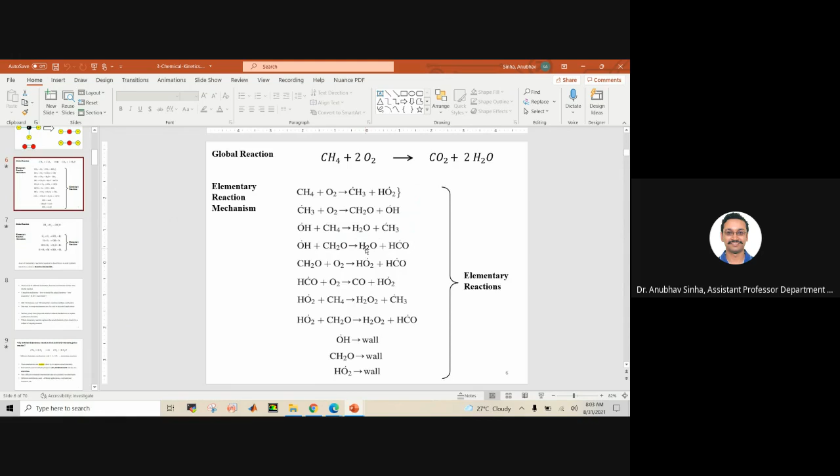Sir, free body or FRE? Three, not free, three body. Let me go to that slide. Generally we have two molecules or two species colliding and forming something, but there also exist other cases. Let me look at the detailed reaction where we have defined different types of... yes, this one.

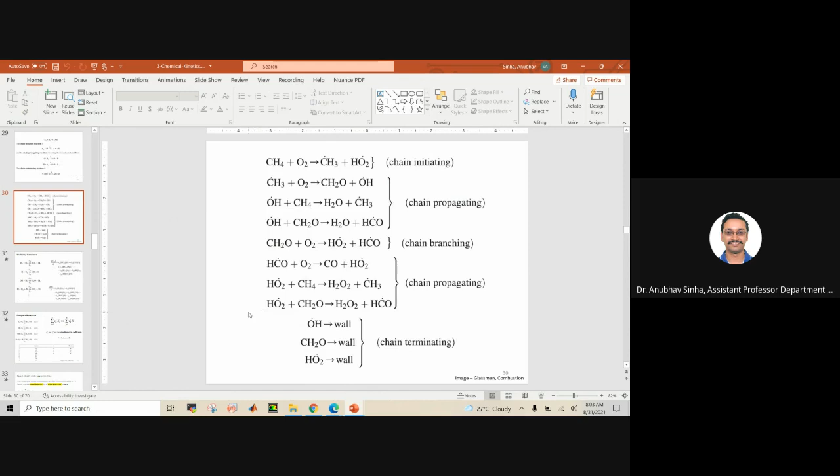This example does not have that, but there are certain reactions which will be combination of three body. Let me see if I have any such example. Okay, like this. So what happens? Two radicals combine with any third body, and they form a stable atom, stable molecule.

So what type of reaction is this? Chain propagating or chain terminating? Yes, this is third body. Sir, it is terminating. Terminating.

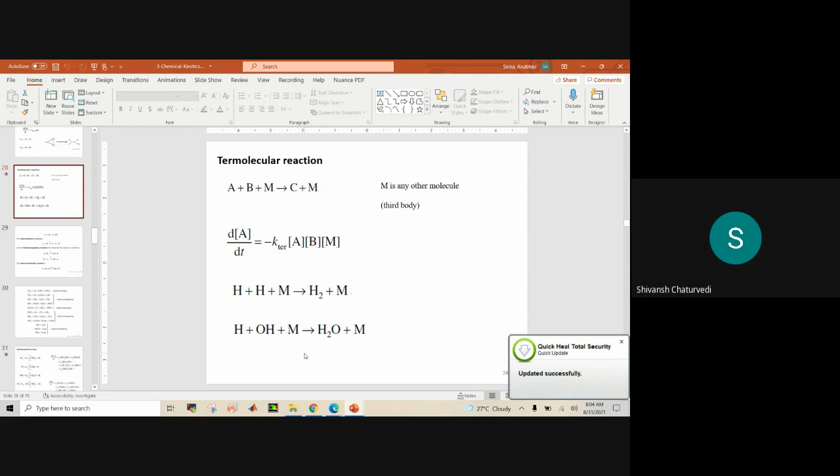If you remember when we talked about bimolecular collision, here now we need to consider three body collision. So will it be more probable to have three body reactions when you have a large number of atoms or a small number of atoms? A large number of atoms. If there are a large number, there are higher chances, higher probability, right?

We generally talk about probability, the probability that two atoms will hit, and that probability will be between 0 and 1. It could be low, it could be high, but it will vary between 0 and 1.

So at higher pressures, do you think the number of molecules will be higher? Number of molecules per unit volume will be higher or lower? Sir, it will be higher. Higher. So we'll have higher molecular density, molecules per unit volume will be higher.

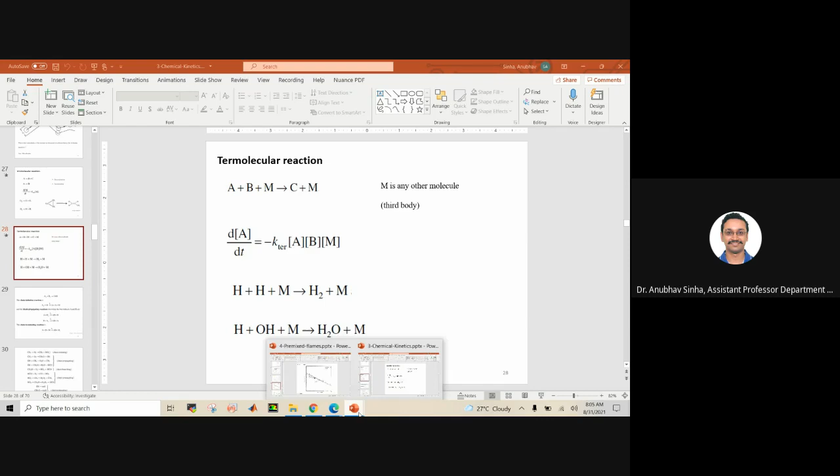The probability that they will collide will be higher, and the probability that they will lead to this type of reaction will be higher. Because of that, this decreases. Flame speed decreases with pressure. Is this clear?

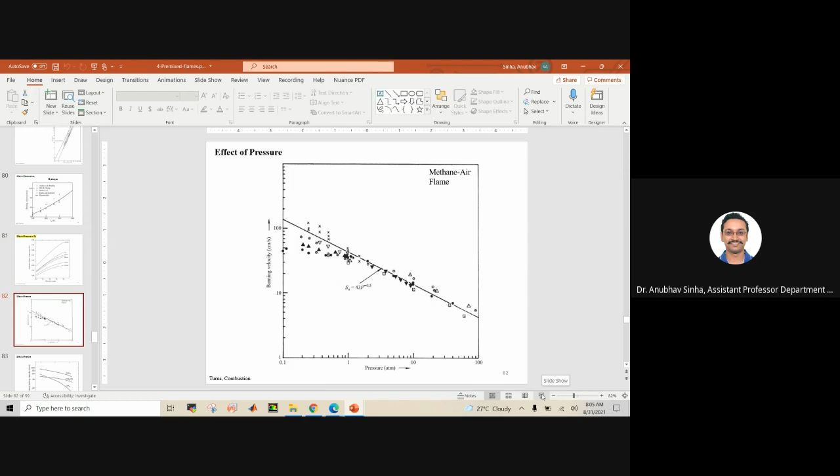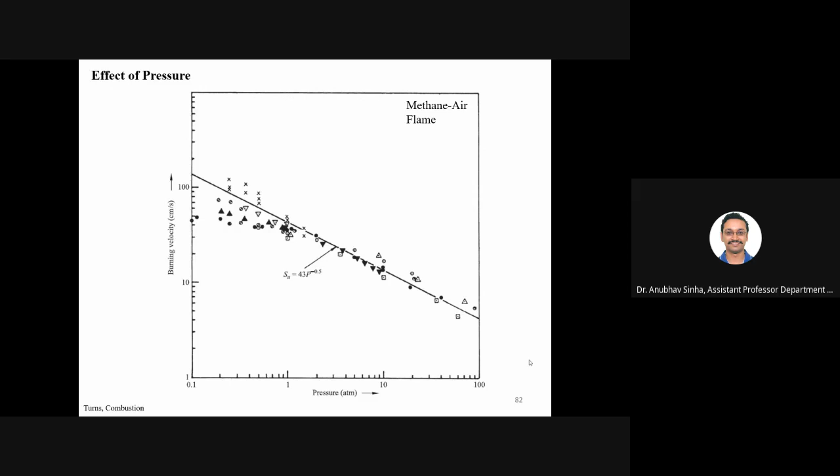Yes or no? You want me to repeat it, or is it clear? Sir, it is clear. Okay, fine.

So this was about the effect of pressure. Now moving on. Up to here we have discussed, right? We'll just summarize. We talked about equivalence ratio, how SL varies, this was a homework. So how many of you have looked into this?

What is the real reason, or why is the peak temperature not at the stoichiometric mixture but at a slightly richer mixture? What is the reason? Can anyone explain? Yes?

Okay, you do some search and mail it to me. Maybe I will wait for your mails. When you all have mailed, then I will discuss in the class. I will give some marks for that. So do some search, you can easily get some numbers or figure out the reason. Try to think of it and come up with an explanation. Then I will finally explain what is going on.

Okay, so this is about equivalence ratio and temperature. We have seen that if you increase the initial temperature, SL will increase. Just now we discussed about pressure. And inert gas, basically, has a lower specific heat than nitrogen, so SL becomes higher. Okay, so all this we have already discussed.

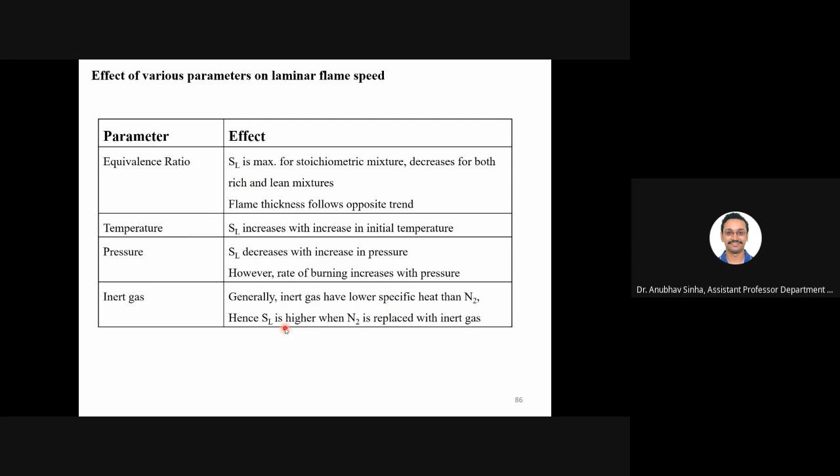Now let us take one example before we move on to turbulent flames. One simple example I wanted to highlight to show what issues are involved. When we talked about flame speed measurement, right, this is one method that we discussed: if you have a Bunsen burner, you just take an image like this.

Or there are Schlieren images, you can take an image of the flame, and you say that a uniform velocity U is coming, and U sin theta will give you SL. Is this correct? Yes sir. Anything that looks suspicious, or any assumption which may or may not be correct?

So let me say I am assuming that your velocity U is uniform throughout this cross section. Is it a good assumption? Can anyone see any problem with that?

Or is it okay? U should be uniform. What do you feel? Sir, U will probably increase ahead. No, not about this direction, I am talking about this. Okay, let me draw.

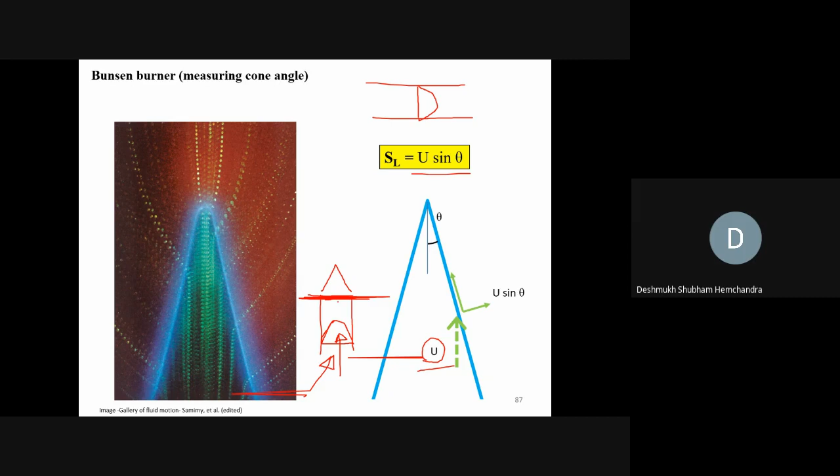Yes, sir. Okay. And in Hagen-Poiseuille flow, when you talk about flow in a tube, you know that the maximum will be how much of the average? Double. Double. So, and what else do you know? It is a parabolic profile. So, can I say that the velocity profile is symmetric and varies like this?

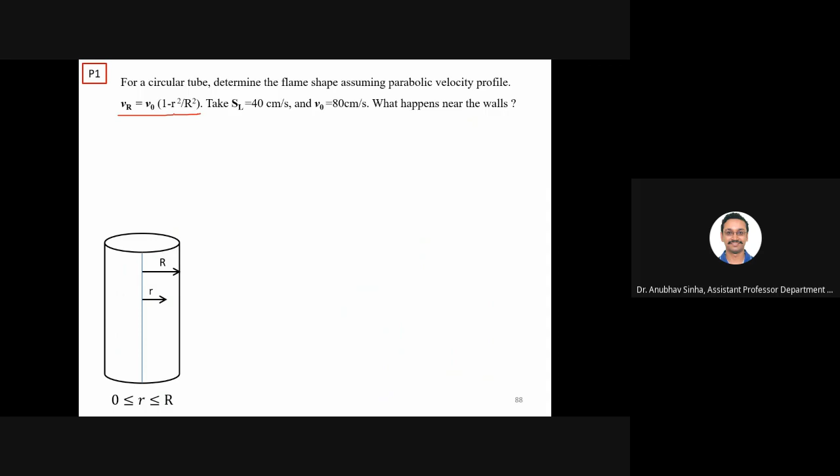V naught is what? Vr is the radial velocity at radius r, I should write it small r. Okay, Vr is equal to V naught into 1 minus r square by R square. So it will be at the center, it will be V naught, so V naught is the maximum velocity. And what is the velocity at the wall? Let us say small r is equal to big R, capital R. So what is the velocity then? It is 0. 0. So it satisfies your parabolic velocity profile, right? This equation.

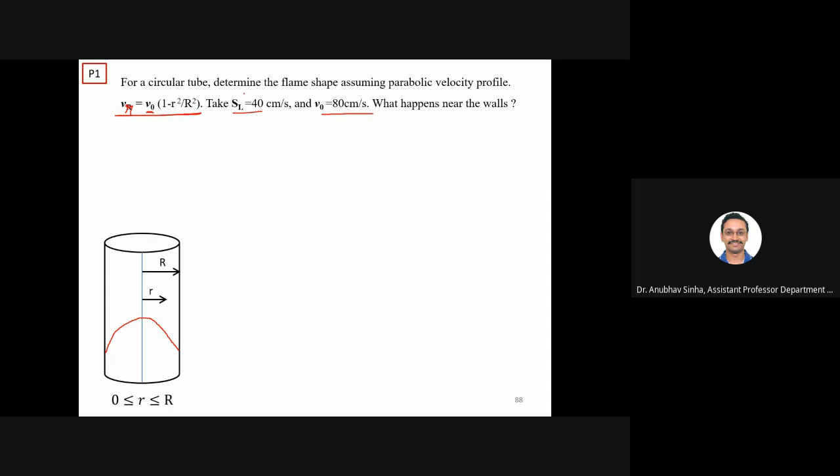Everyone is clear about this? Yes, sir. Okay, so this is given to us, and we know that SL, this corresponds to roughly, I think, for methane. Okay, now we notice for v naught equal to 80. This is also given. So the question is whether you can find the SL, and based on that, can you find how the flame looks like? Okay, here what I have assumed is that the flame is having a straight line.

So let us examine it more closely. Let us probe this, whether it will be a straight line or not. Okay, so this is given to us. So what you can do is, we also know that SL will be equal to U sin theta.

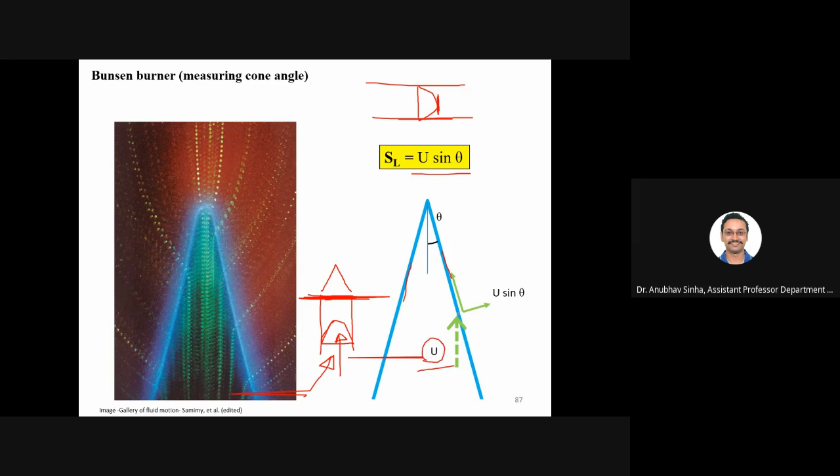So if you look at this side, let us say that at each different point, let me delete it, make it clear. Okay, now let us say at each point the velocity is different. Okay, that was the assumption that U is uniform. Let us say even if it is not uniform. So what will happen? Let us say it is U1 here, U2 here. But at each point, since I am assuming the flame to be stationary, flame is not moving, so at each point, SL will be equal to U1 sin theta 1, U2 sin theta 2.

Do you agree with that? SL has to match this component of velocity. That is what is required. U being uniform is not necessary, but SL should be matching this component, U sin theta, for that local U sin theta. That is required.

Sir, will theta be constant? No, theta will not be constant, that's what I'm trying to highlight in this example. Towards the center, theta will keep decreasing. Yes, in the next two slides we'll see how theta will vary. But the important thing here is that SL will match whatever U or theta is there. SL will try to match. Then only the flame will be stationary, otherwise the flame will move up or down.

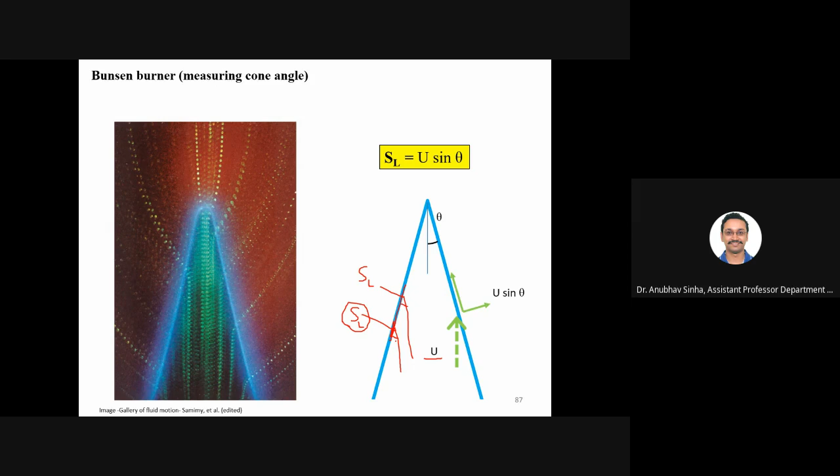So what we can do is write SL in the form of sin theta. U we know, the expression of U I'll get from here. This is U sin theta. Now I can write sin theta equals SL divided by this. Is this all right?

Yes sir. So let us make an Excel file and calculate sin theta for different values of r by R. r by R can vary from 0 to 1, so I have taken 0.1 to 0.9. Now what will be sin theta? Sin theta is this much. So if I know r by R, if I know v naught, if I know SL, I can calculate sin theta.

Sir, sin theta is exceeding 1, which is not possible. Yes, we'll come to that, good question. For now, let us forget about that point. Up to here, are you okay? Yes sir, it is okay.

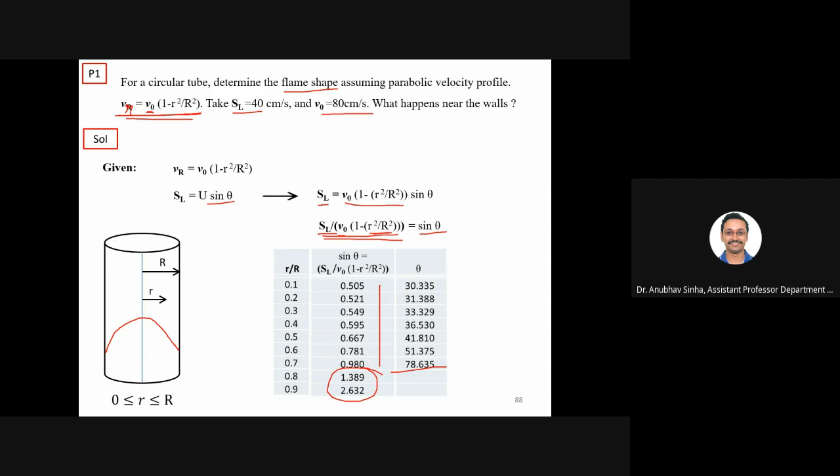Now I will define theta for all these points. So what do you see? Is theta constant or is it changing with r? It is changing because of that velocity function. Yes, so this is how you can plot it. Theta is changing with small r, the radius of the tube. So initially what we thought was that it will look like a straight line. That is approximately okay, you can say it is uniform and a straight line, but actually in real what happens is theta is increasing as you go out. So theta 1 will be smaller than theta 2, which will be smaller than theta 3, and the actual profile will somewhat look like this. Is it clear?

Yes, no? People are present or not? Sir, could you repeat the point? Yes sir. Someone has a question? Please repeat, sir, could you repeat the last part?

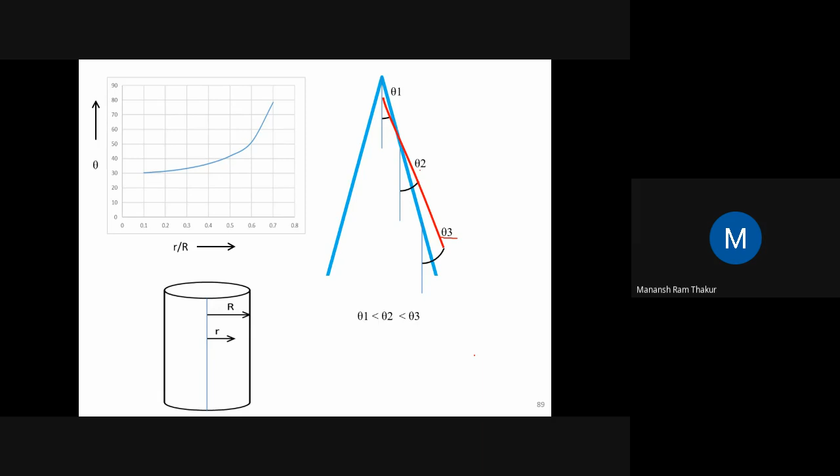Okay, so basically what I am saying is, using this relation, I calculated sin theta for different r by R, different radius basically. From sin theta, if you take the inverse, sin inverse, you will get theta. Up to here we have calculated. Let us for a moment forget about this, I will explain again. So I have theta for different radial positions, that's all, and that is what I am plotting here. So if you keep on increasing radius, your theta will increase. Is this clear?

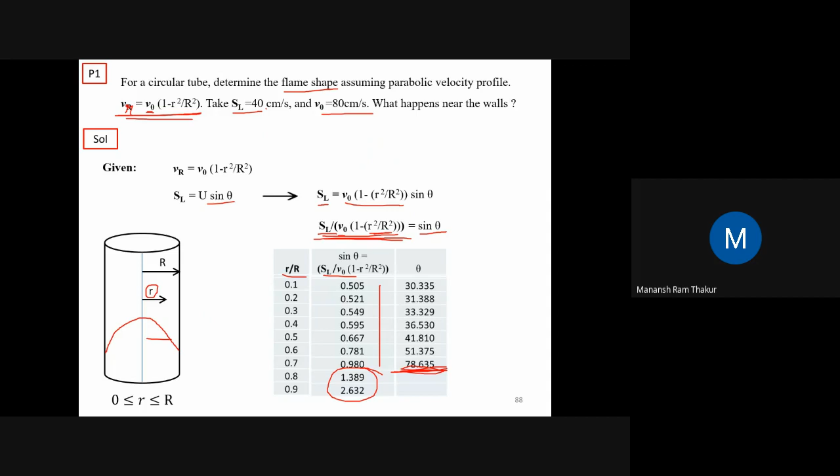Yes. Sir, is it the ratio? You had a doubt in the last slide as well, here you have a question. Sir, it is increasing with the ratio, I can't understand why it is increasing with R. So you can just follow this relation, there is no separate logic why it increases, this is just coming from this equation. Basically, I will come to the logic also.

This is the velocity profile we have. We know that at any point, whatever U will be, U sin theta has to be equal to SL, otherwise it will not be a stationary flame, right? So from this, if I substitute U here, I will get this. Then just divide SL by this quantity, you will get sin theta, right? Now what is given? SL is already given to us, 40 centimeters per second. This is 80, so it becomes basically 1 by 2, and this is the only variable, right? If I want to calculate sin theta, what value do I need to know?

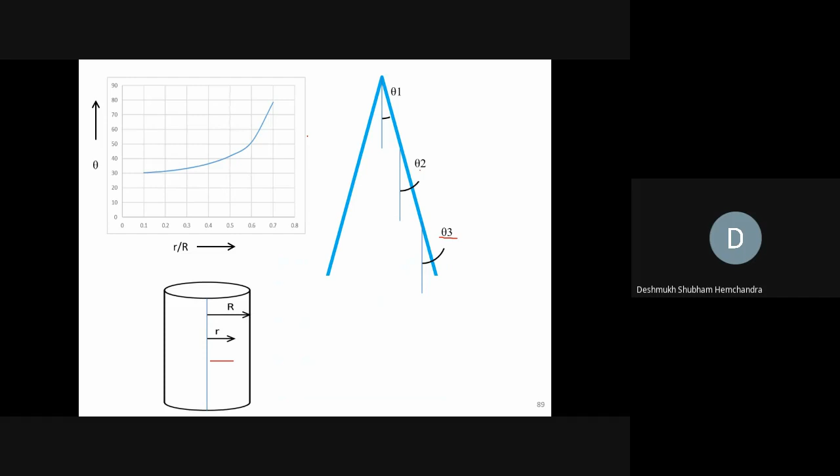Near the wall, okay, we have not covered the topic, but there's something called quenching. So near the wall, the flame speed will decrease. In the next topic I will clarify that. So there, the flame will basically be sitting on the wall.

Near the wall there are some other interesting things going on that maybe today we'll try to cover. Because of that, at 0.8 and 0.9 we will not use sin theta, we'll say that the flame is anchored on the wall.

So as you can see here also, if you look carefully, what it shows is that theta is slowly approaching 90 degrees, right? So basically, this is your flame tube.

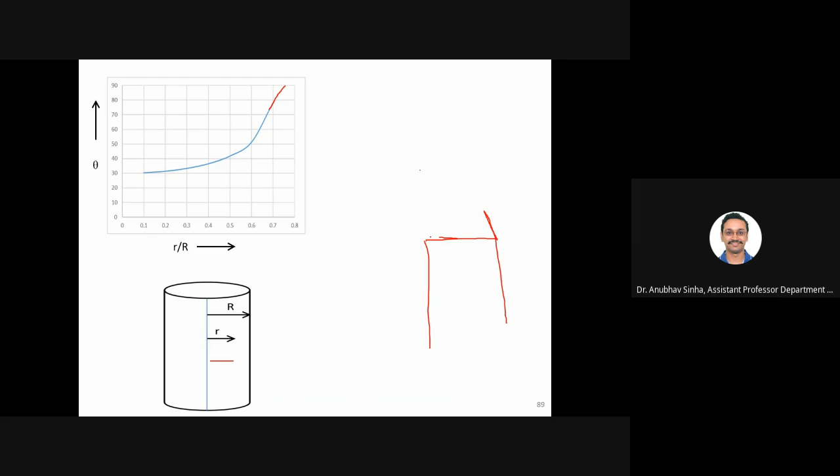What it means is that at the end, it will be almost 90 degrees sort of, which is not actually true, but it will approach that value. And again, what happens is that near the wall it gets quenched, it extracts heat.

So SL decreases. So all this relation we have talked about will not be valid when you approach very near to the wall. Very close to the wall, it will not be valid.

So sir, very close to the wall, what will be the value of theta? It will be, the flame will be anchored. Okay, just be patient for some more time.

In the next chapter, initially in the first few slides, I will discuss about it - what happens near the wall. For now, just assume that the flame is getting anchored.

How it gets anchored is an interesting topic, but for the next chapter. We need to understand what is quenching, what role the wall plays in quenching, and what sort of velocity profile we can observe. I need to give you some background, then I will talk about it.

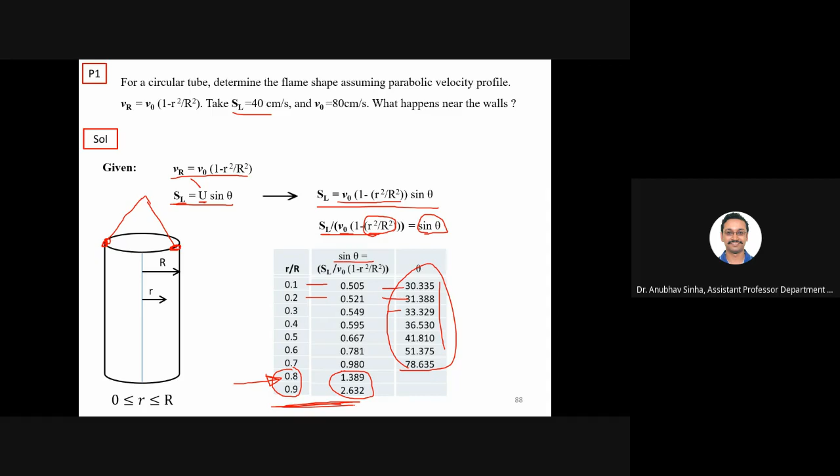Is it clear? Yes sir, it's fine. This is good that you asked. This is a separate topic itself, so let us delay it till we reach there.

Okay, for now what I will do is, we have covered laminar flame, and we'll quickly look into turbulent premixed flames, then we'll move on to the next topic about wall quenching. I think the few slides I presented in the last class, I'll anyway quickly go through them again.

Strictly speaking, it is very difficult to define what turbulence is, but we know there are some characteristic features. One of them is it will be non-uniform, it will be unsteady, it will have higher transport properties, it will be irregular.

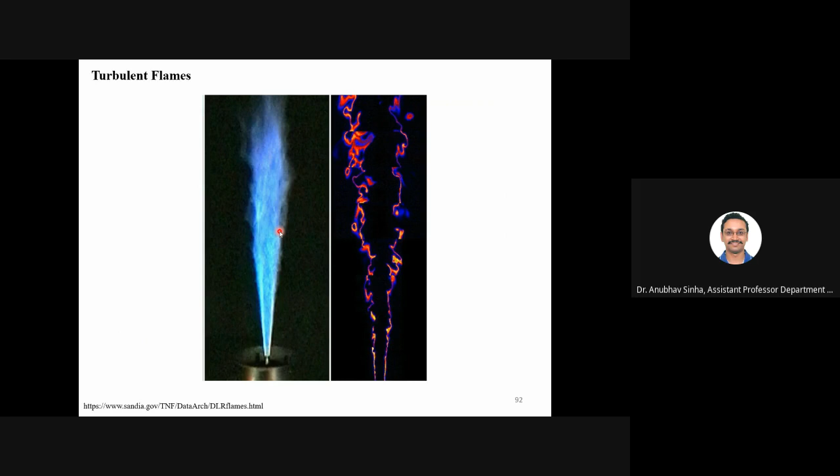So all those properties define turbulence, but visually you can see there is a difference. For combustion study, what is important for us is that the flame area changes. Let us see what happens.

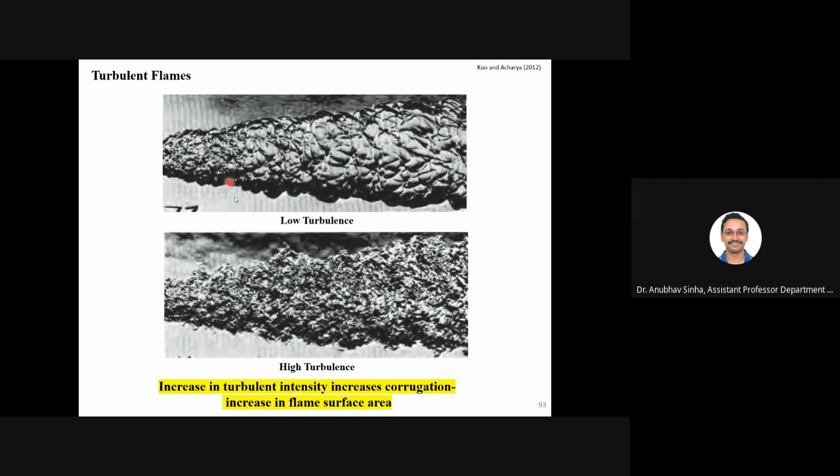Now, how will it affect flame speed, or what impact will it have on combustion? To understand that, see, this is the simplest example for a 1D flame, which is what I'm using for most of the concepts.

So this is a simple 1D flame. Fuel is coming from the left and burned gases are on the right. So what will happen because of turbulence is that your flame surface area is increased because it is getting corrugated. Remember, last class I also discussed this.

Let us say you have two tubes, one smaller tube, one larger tube. So the larger tube will have a larger flame surface area and it will consume more fuel, right? If we talk about laminar flame, SL is the same, so m dot will be more for this, right?

For the same exact conditions, flow rate will be higher for a larger diameter tube, right? What happened students, are you sleeping or not connected? The second one, m dot will be larger. So, not turbulent, let me clarify.

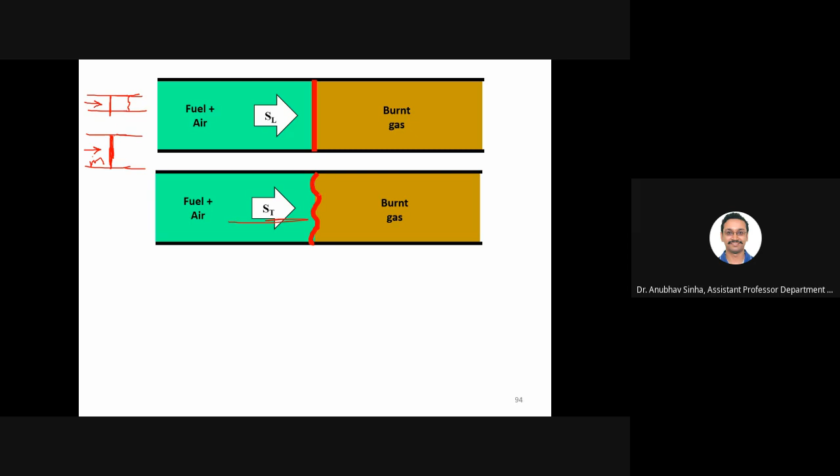Now somehow what I can do is have this same diameter but a larger surface area. Let us say I have an area like this. Then I can increase the flow rate, right? More fuel it can consume. The same thing is happening here. It has a larger surface area and it is able to consume more fuel. So ST will be larger than SL.

So there are a lot of interesting processes going on in turbulent flame. Turbulence also affects your chemistry, which is an area of ongoing research. But to keep it simple, we'll focus on the increase in flame surface area. This is one of the dominant mechanisms which helps ST to be larger than SL.

So this will be true: turbulent flame will have a higher flame speed when compared to laminar flame speed. Sir, larger area is clear, but why should it have a higher S?

Okay, that's why I'm giving you this example of two tubes. Stop me whenever you have a doubt. So two tubes, smaller diameter, larger diameter. Let us say m dot 1, m dot 2. Which will be larger, m dot 1 or m dot 2? M dot 2. Why?

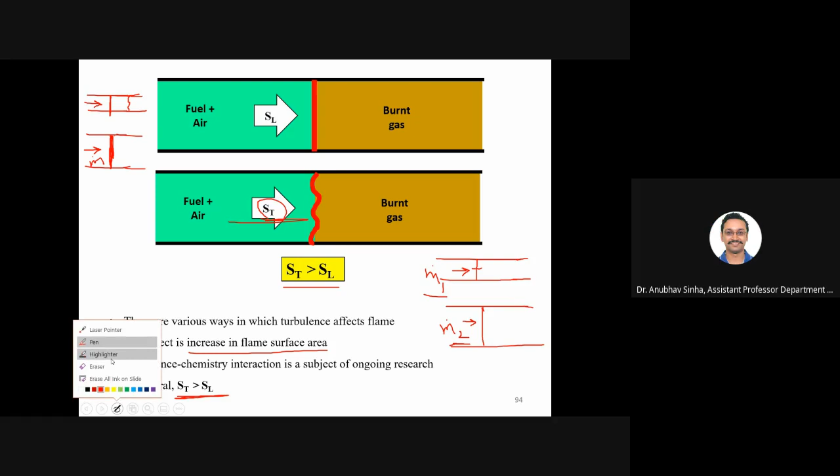So the only reason could be what? The flame area is different, right? Flame is an animal which eats fuel, let us look at it that way. So we have a bigger animal here, right?

Yes sir, I'm saying we have a bigger animal here, we have a smaller animal here, so this one is eating more fuel. Now if I take this bigger animal and somehow adjust it into a smaller tube, it will keep on eating the same amount of fuel, it will keep eating M2 only. Then I will get a higher flame speed here. Do you agree or not? Yes sir, I understood that part.

Sir, so for same area, isn't it how we define turbulent in the form of Reynolds number? So Reynolds number high means velocity high, sorry, turbulent and laminar is differentiated by Reynolds number. Correct, Reynolds number differentiates, so higher Reynolds number means higher velocity, that's why it should be turbulent. So automatically in case of turbulent, its velocity should be higher, no?

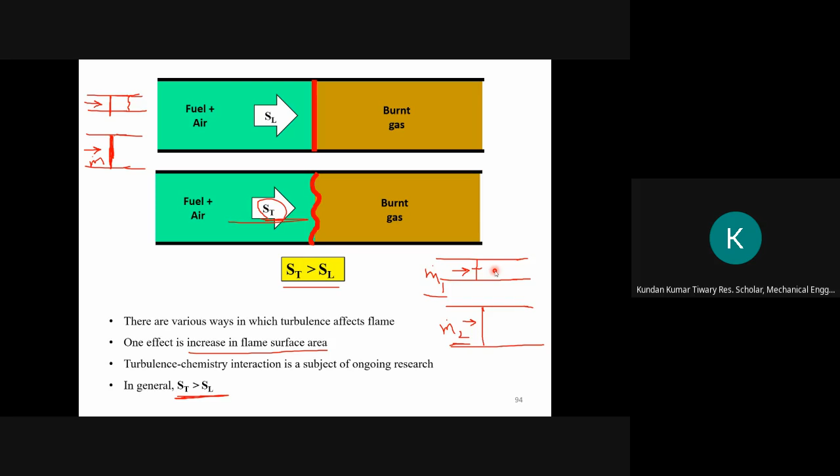Why are we comparing, meaning ST greater than SL? Okay, I am just taking a very simple comparison to explain why. See, you're correct, velocity will be higher, but the question is why, how is the flame able to eat up more fuel? If your ST is higher, what does it mean? Simply means more fuel is coming, more fuel is getting consumed per unit time.

Suppose I am burning 1 kilogram of methane in a laminar flame. In a turbulent flame, I can burn 3 kilograms of methane, 3 kilograms per second, or 3 grams per second, whatever the case may be. So even for the same tube diameter, if I have higher velocity or higher initial turbulence, somehow I am managed to get one laminar flame and one turbulent flame.

So what I am trying to explain here is that if you have a turbulent flame, it will have higher capacity to eat fuel. That's all, and that can be attributed to one reason: flame surface area.

Is this clear or not clear? Yes, sir. Everyone? Sir, I have a question.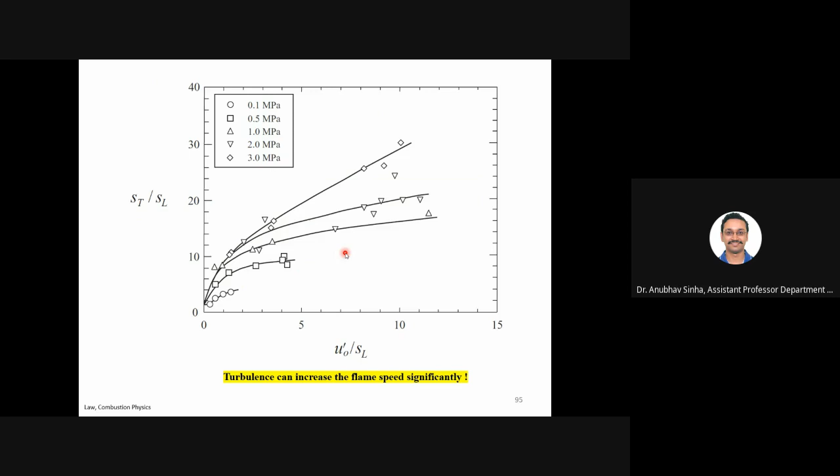Now, other than Reynolds number, what Reynolds number is basically for any flow, it could be burned gas, it could be fresh gas. But for a reacting flow or a flame, a more relevant number, or more important number, is Damkohler number. We define it as the ratio of turbulent mixing time scale and chemical reaction time scale.

So turbulent mixing time I will define from the length scale and the fluctuating velocity, V dash RMS. Chemical reaction time is the characteristic time required for chemical reactions, so it will be delta, flame thickness, by SL. This is the time in which the flow passes through the flame. This is one way to define it.

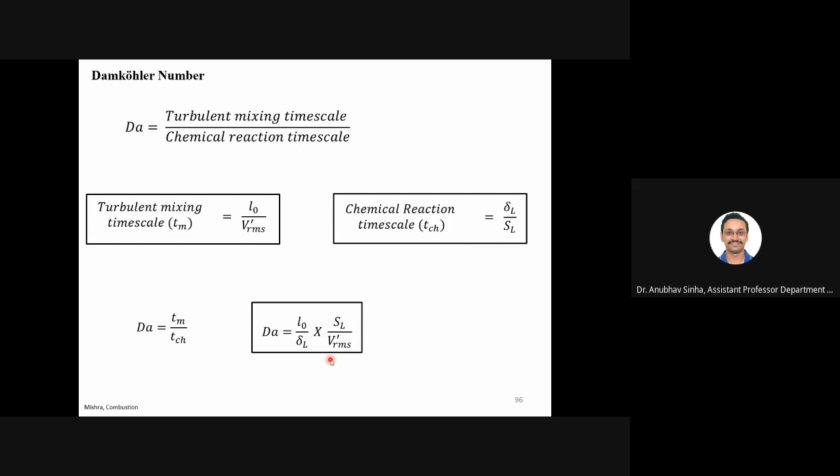So if I combine these two, what will I get? Damkohler number is Tm by Tch. So I can write it in this way, or this way. This is okay, I'm just multiplying these two, that's all. This is how you define your Damkohler number.

Let us talk about this ratio. One is the turbulent time scale, or mechanical time scale as someone says, and this is the chemical time scale. So what could happen, what could be the two extremes? One possible case could be that turbulent time scale is larger, or the chemical time scale is larger. So one regime could be the fast chemistry regime, where your chemical time scale is small. Chemical time is smaller than the flow time, and Damkohler number becomes very large.

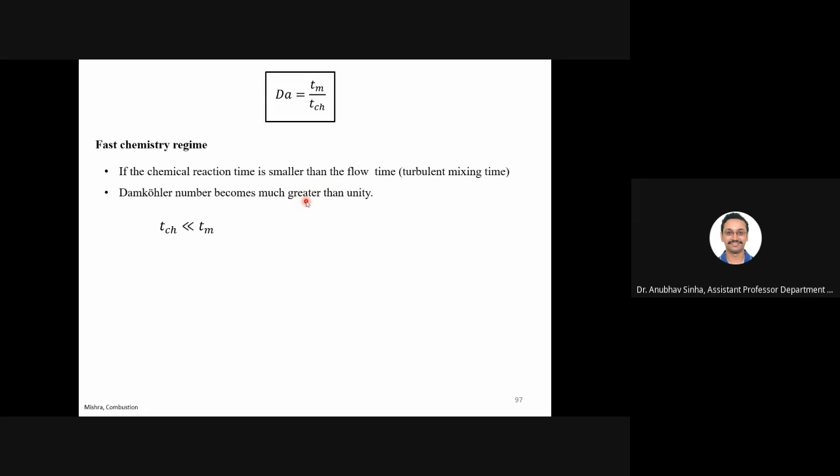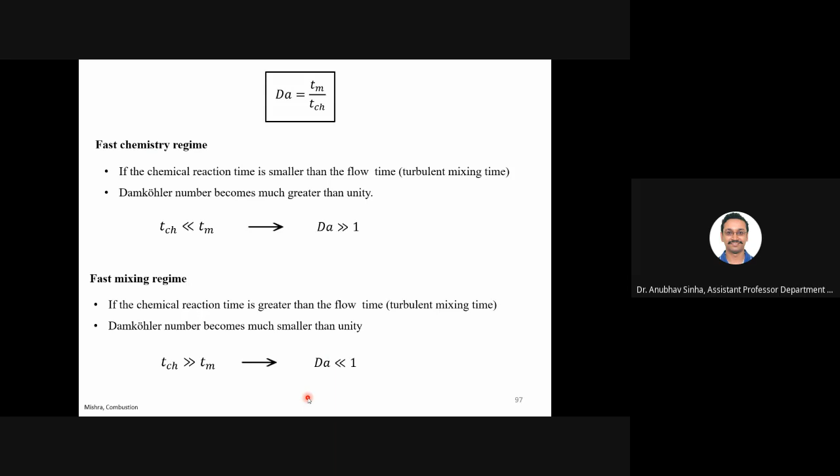Another extreme could be where your mixing is much more intense. Mixing time, or turbulent time scale, is much smaller than chemical time scale, then Damkohler number will become very small. So these are the two regimes: fast chemistry regime and fast mixing regime. For the first, Damkohler number is very large, and here Damkohler number is very small. Is this clear? Yes, sir.

Okay, so with that we end this chapter. Let us see how much time we have. Okay, we have some time, so we can start the next topic.